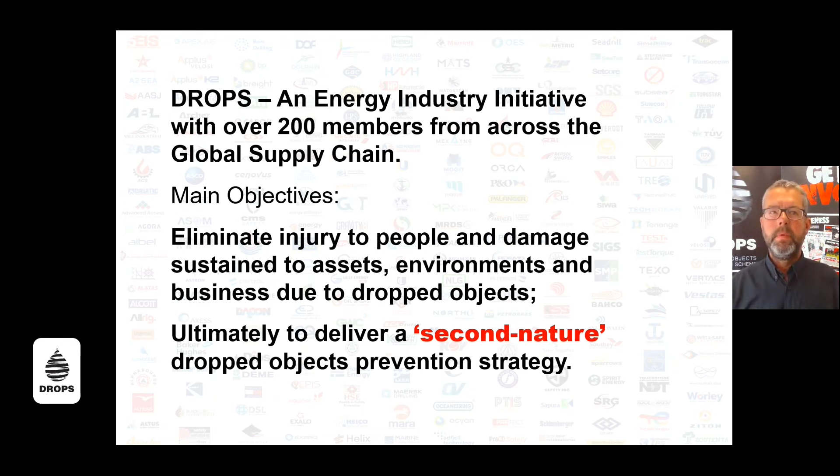First, we must acknowledge that there is a problem and that dropped objects do pose a significant threat to the business. Data from various sources confirms that dropped objects do continue to harm and kill personnel and members of the public. Typically, we learn from the unfortunate consequences of incidents. But once there has been an unplanned release of gravity's constant acceleration factor, there will always be a consequence based on the item's mass and the distance it falls.

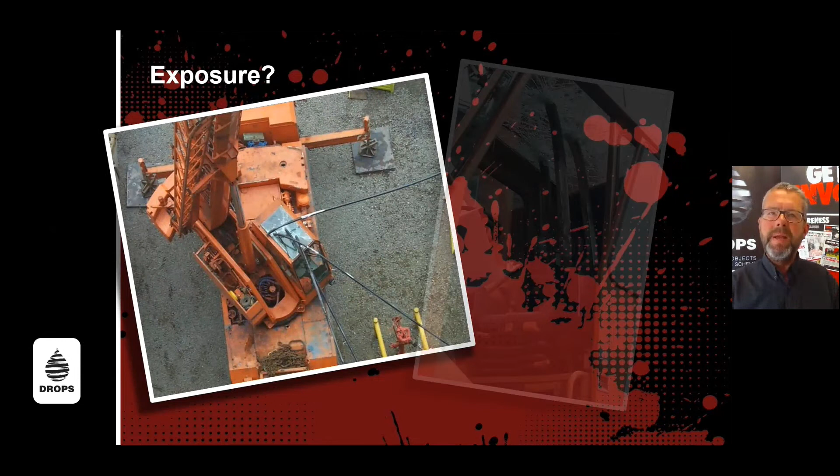Equipment damage can result in unnecessary loss and repairs, or loss of containment that results in spills or unnecessary waste. Ultimately, a dropped object incident will always cause damage to the business through lost time, lost money, and reputation damage. In studying dropped object incidents during lifting, there are many examples that can be described as failures in load securement. These fan tubes were being lifted in an open tray. The crane operator was very lucky that day.

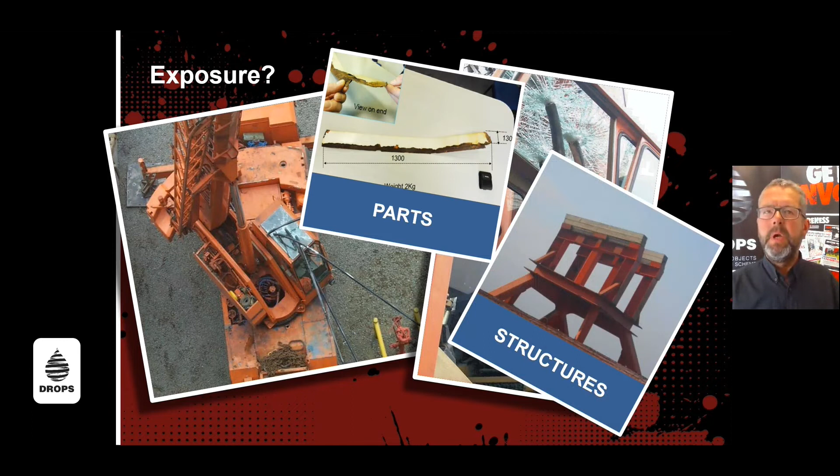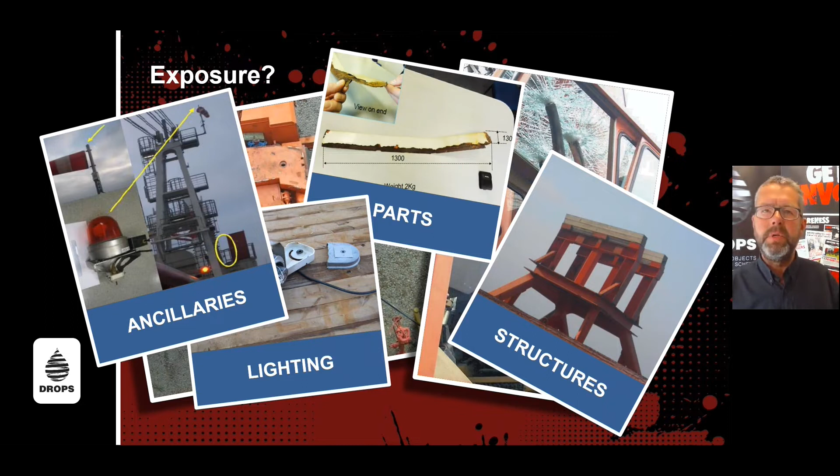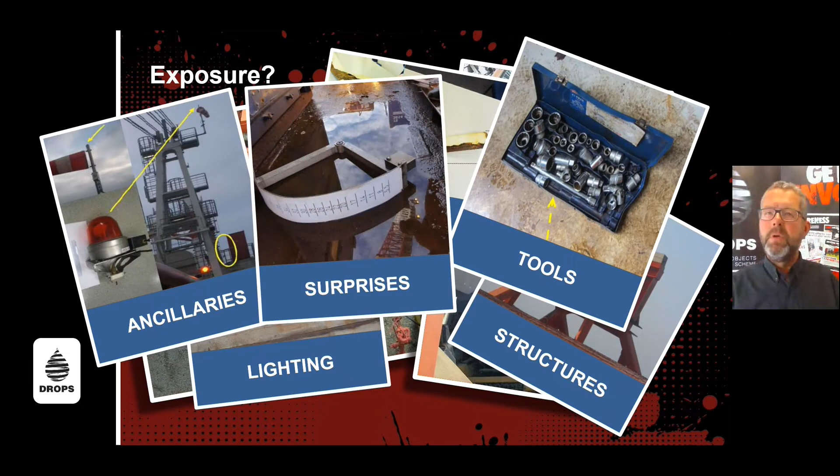Equally, there are incidents that relate to lifting and lifting equipment and illustrate that dropped objects can occur anywhere and at any time. After all, lifting equipment and ancillary fixings are subjected to continuous loading from lifting activities and the working environment. Cranes require maintenance at height, so tools can be dropped. And there's always surprises, from dropped level indicators, balls of congealed grease, and even nuts and bolts that secure individual items to the structure.

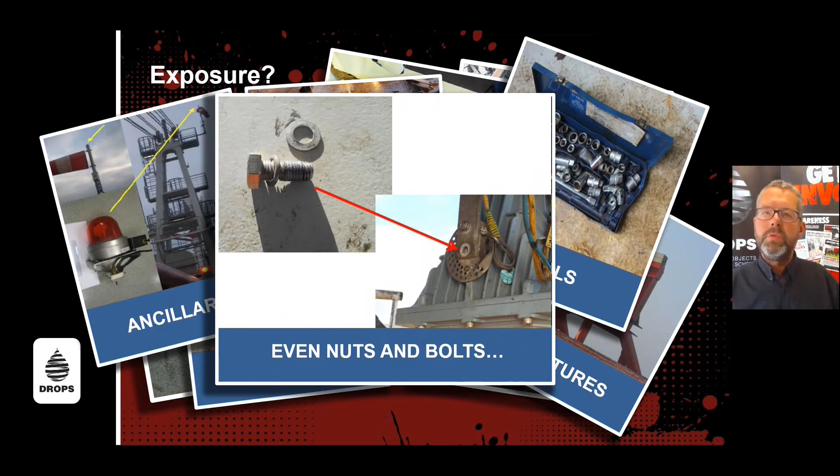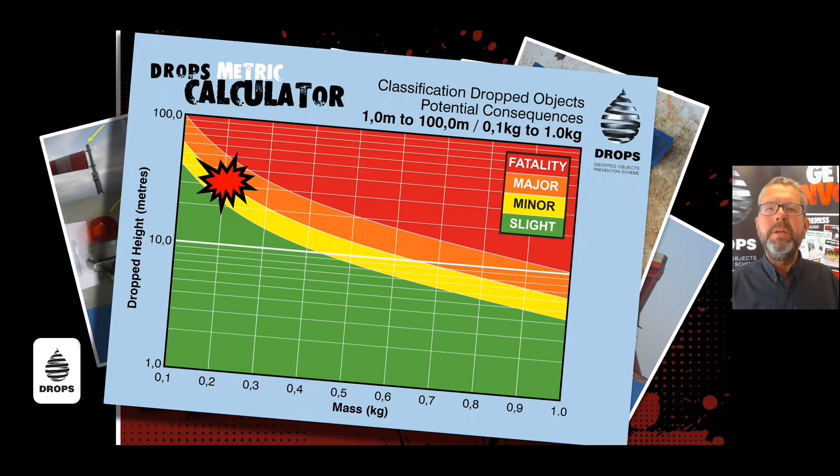But when using DROPS tools, such as the consequence calculator, it is apparent that even the smallest of items that fall from height can cause harm. In this example, if a 200-gram bolt was to be dropped over 30 meters, a life-changing major injury would be very likely. All incidents will have underlying causal factors, and investigations will highlight areas for improvement. Well, these common causes of dropped objects can also be considered as prompts to inform task planning and risk assessments.

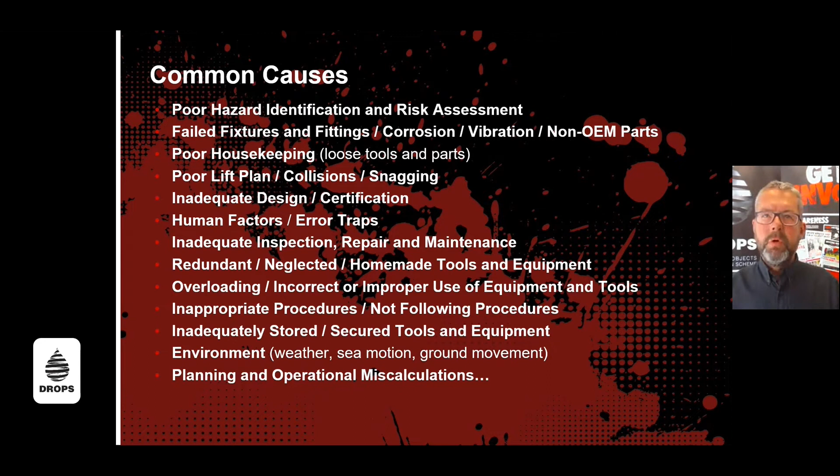When it comes to dropped objects during lifting, incidents show that almost all of these common factors are likely to prevail at the worksite. Human factors, or the range of physical, psychological, social, organizational influences which can affect how people carry out tasks, can also be considered as error traps, or the factors and situations that cause people to make mistakes. This is an area of focus that many industries have explored and addressed. These common causes also inform the continued development and improvement of shared industry guidance.

Although IOGP is the voice of the oil and gas sector, their recommended practice for lifting and hoisting safety is readily adaptable and includes a number of useful templates. Perhaps more importantly, it addresses safety management system elements, emphasizing that there are essential principles for every activity in every task. The guidance for categorizing lifts and developing specific lift plans is certainly an opportunity to address this in detail. Other industry resources, such as HPOG, the Human Performance Oil and Gas, presents adaptations of shared best practice in identifying and managing the factors that influence people and how they respond and work.

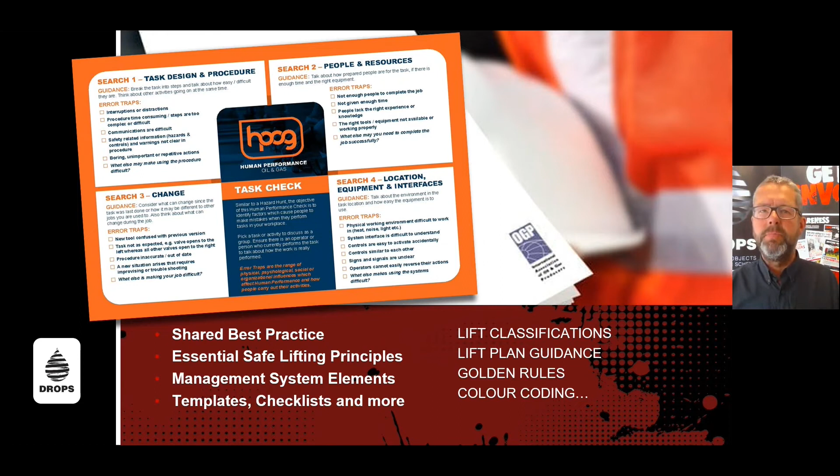But for DROPS, a comprehensive recommended practice offers high-level administrative guidance for establishing a scheme and addressing the fundamental requirements of a dropped object prevention strategy across every step. Take the time to realistically identify and assess dropped object hazards. This may be the opportunity to eliminate or substitute, change the hazards. All controls must be authorized and verified. Ensure these are being managed throughout the task planning and execution.

Ensure there is opportunity to talk about dropped object potential during pre-lift toolbox talks to reaffirm how they might occur, what controls are in place, and who will be responsible for them at each step. Pre-lift equipment inspections may follow a set checklist or picture book, but all personnel should be familiar with the concept of reliable securing, a great resource available from DROPS and a key part of a dropped object prevention management system.

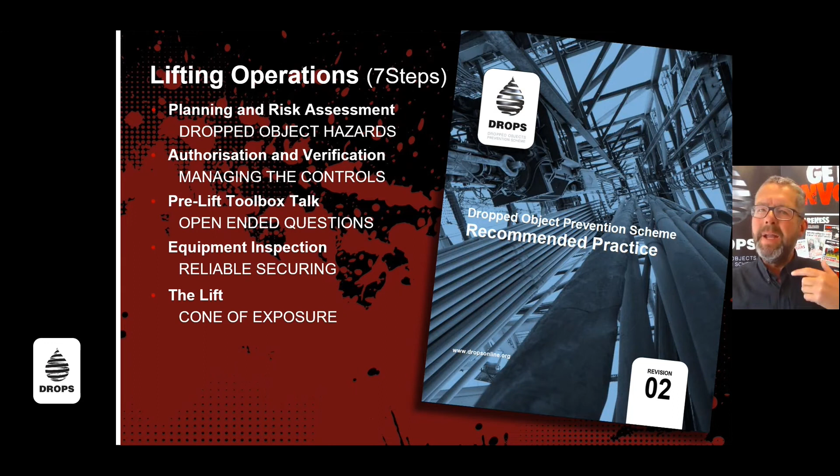As the lift is executed, there's need for constant vigilance in ensuring that access to areas within the cone of exposure remain restricted and that any critical equipment is protected where practical. And once the lift is completed, there are specific tasks to undertake, but also ensure that any damage sustained to equipment or damage to loads is inspected, recorded, and prioritized for corrective action.

Then exploit industry resources designed to support after-action reviews. Walk through and talk through the task to determine what went well and what could be improved.

Returning to reliable securing, this is a fantastic document that contains relevant and readily adaptable guidance for the securing of structures, equipment, and tools at the worksite, particularly where it was secured at height. A section covering bolting best practice, a simple guide to the various types of fastening methods found on equipment, provides basic awareness of the key principles of DROPS.

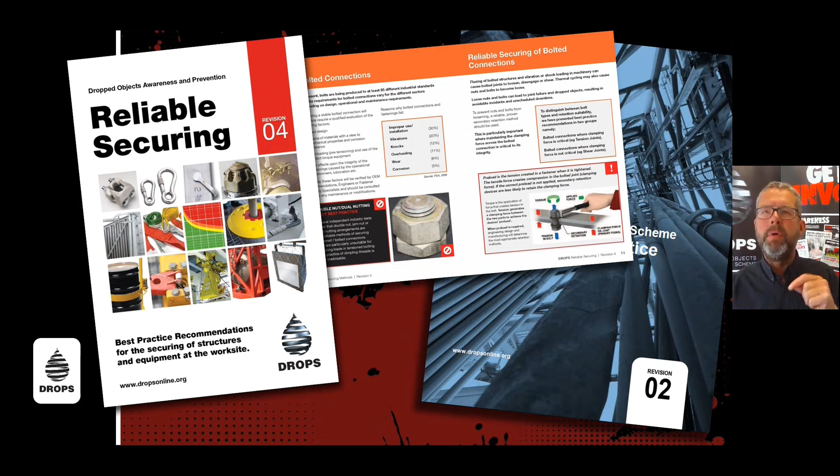Confirm and verify the primary method of fastening, the bolted joint, the clamp, the pin, the hinge, the strap, and make sure it's authorized and is per OEM, Original Equipment Manufacturer recommendations. Consider how this might be affected by external forces such as vibration, loading, etc., and identify the secondary retention device, the locking nut, the locking washer, the lock wire, split pin or safety pin, and understand how this is supposed to perform, and assess the requirements for additional safety securing, such as nets and wires and slings and tethers and lanyards.

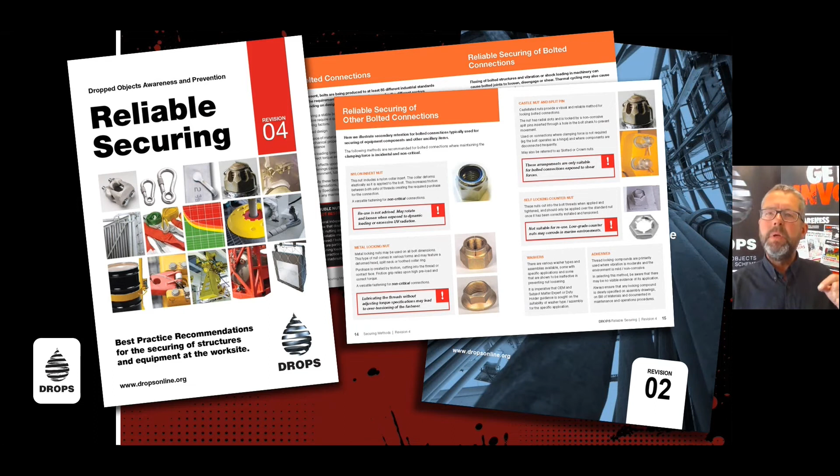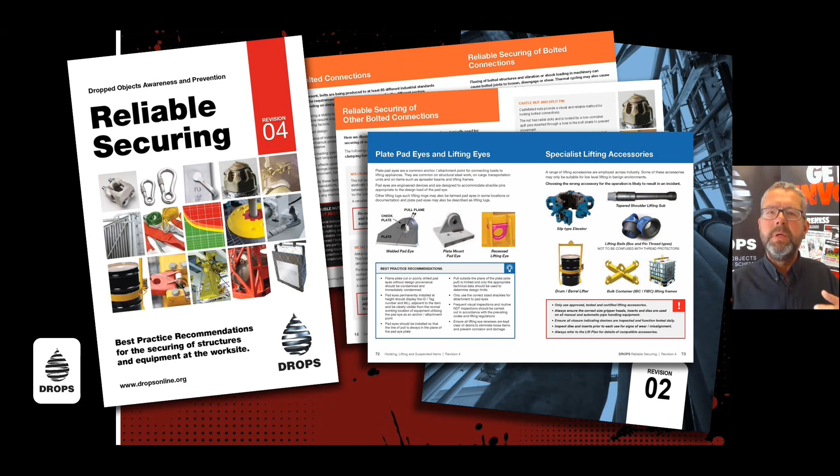Confirm that these are correctly fastened to items and back to the structure, and exploit the pages as overview guides or training and familiarization aids that illustrate a variety of common engineered methods for securing. Explore how each fastening and fixing functions and appreciate what to look for in equipment inspections and confirmations at each task step. Where personnel are required to work on cranes at height, adopt the best practices illustrated in DROPS guidance.

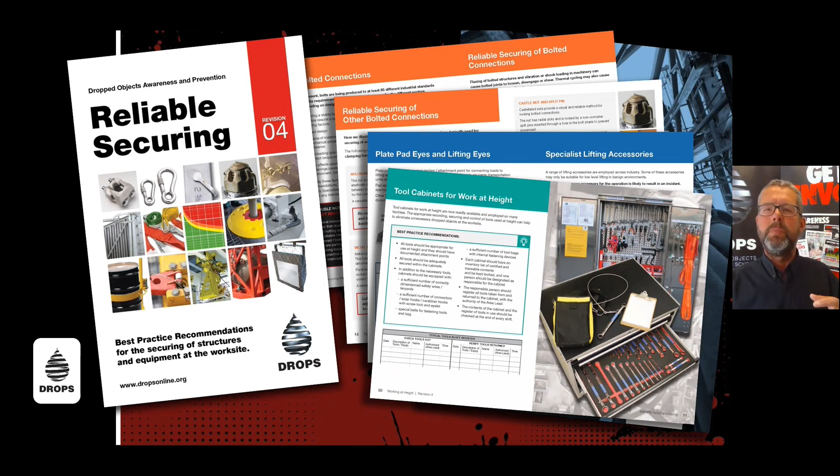Eliminate unnecessary and loose items. Select tools suitable for use at height. Consider bespoke mobile toolkits that contain only the tools required for the equipment. Create inventories, track and trace tools and equipment aloft with logbooks, and ensure 100% tie-off principles are observed from the time the items leave ground level to when they are returned.

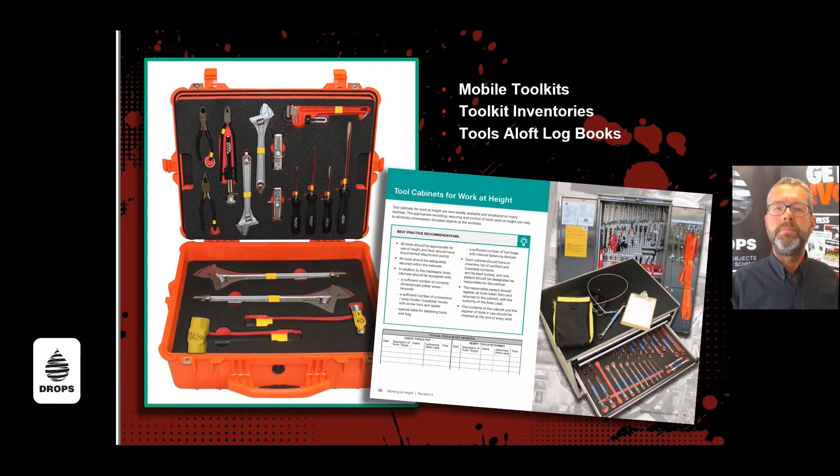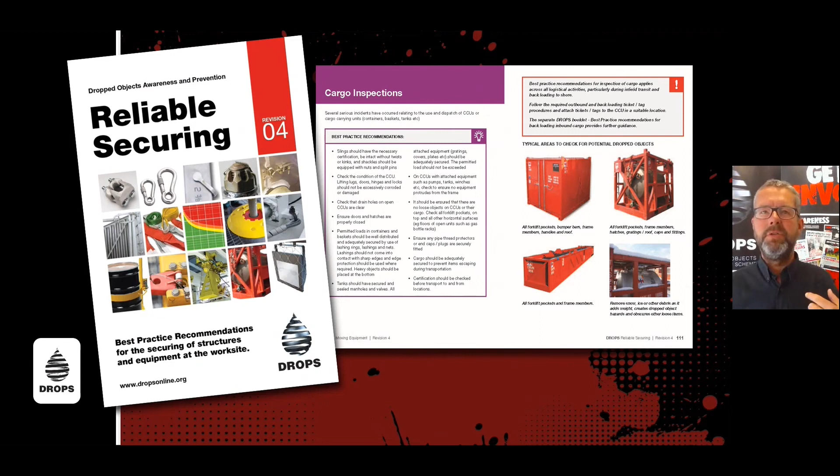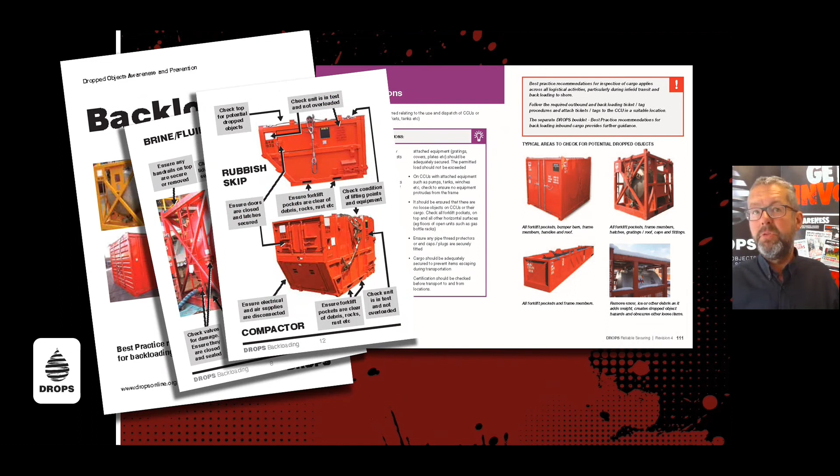Within the booklet, there are many examples of worksite inspection prompts and checks, including pre-lift cargo inspections. Whilst there may be generic checklists, consider how each individual item presents its own unique challenges. DROPS backloading supports this in more detail, with pictorial references presenting key areas to inspect, beyond the obvious checks for loose items or debris in forklift pockets. Adopt the best practices in sharing responsibilities and being accountable for the final checks, particularly when the lift involves the onward transportation of cargo.

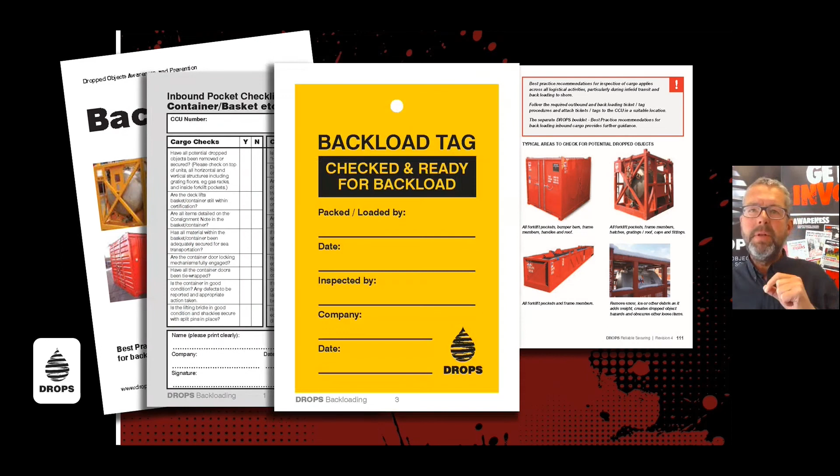And then the 10 questions for a safe lift may be a common prompt, but it is the last step prior to performing the lift, and it's a critical component in confirming and in verifying that all elements of the lift plan, including all securing and safety devices, are in place and functioning correctly, and that the restricted lift area is controlled and clear.

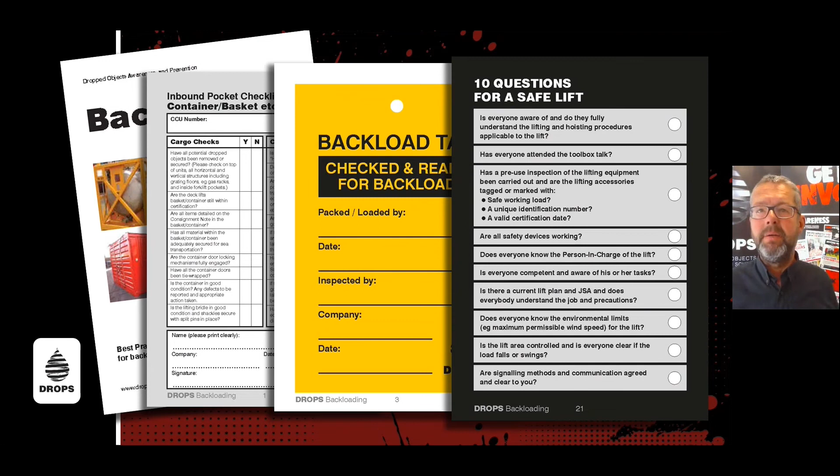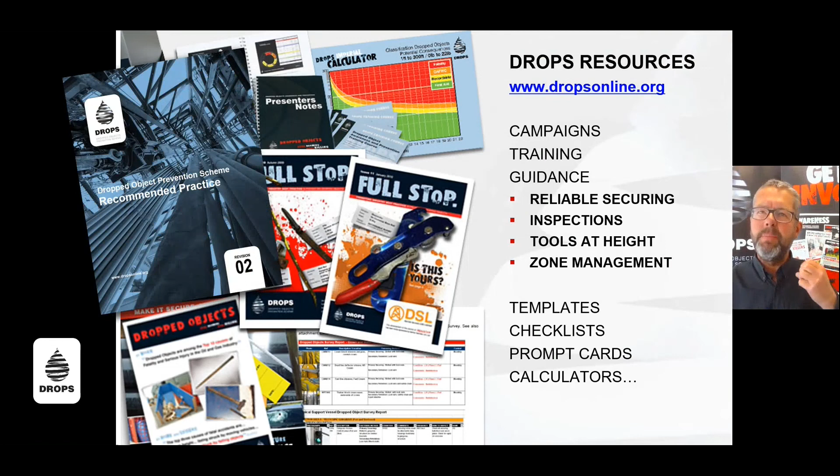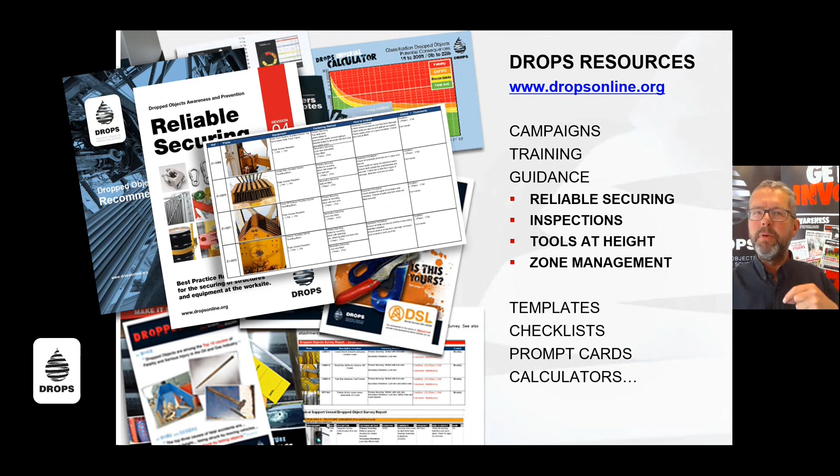In fact, there's a wide range of free to download material available through the DROPS website, from awareness campaigning posters to guidance on establishing management systems and systematic equipment and worksite inspections. The consequence calculator is available in both posterized and functioning Excel format, along with an exclusion zone calculator that can help determine deflection trajectories. Simply enter the height of the object and the deflection point above the ground, and then use the slide bar to alter the deflection point.

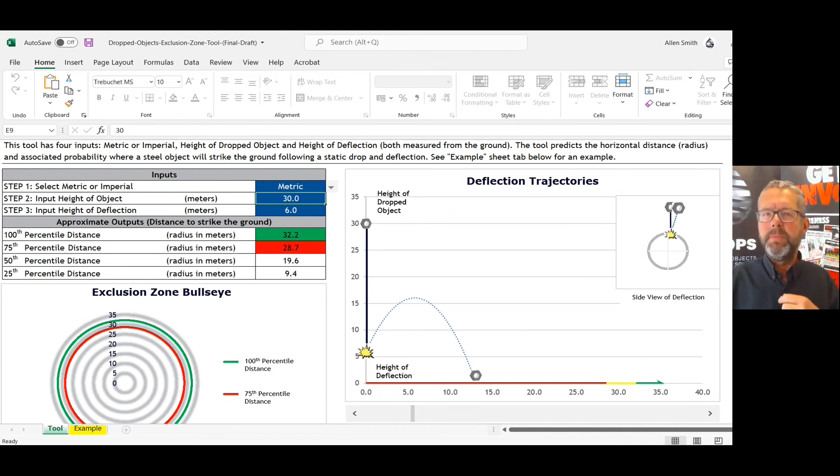It's a great awareness tool, refocusing the task plan to ensure that all aspects of the hierarchy of control have been studied, opportunities for elimination exhausted, opportunities for substitution sampled, and all engineered and administrative controls confirmed and corroborated. There are many other resources available through industry, particularly online, but for dropped object prevention in particular, and with reference to lifting and lifting equipment, I believe you'll find these useful and adaptable. If you do work in the wind energy sector, you will be interested to see an example of DROPS guidance readily adapted for your industry.

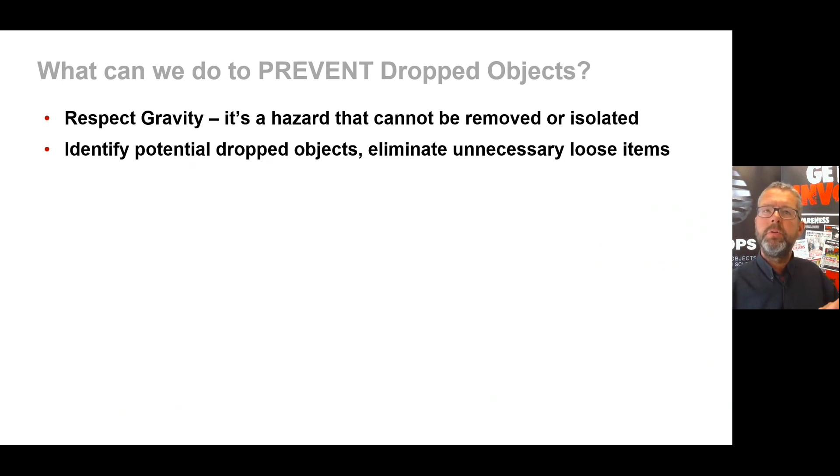So what can we do to prevent dropped objects? Well, respect gravity. It's not quite like other hazards. It cannot be removed. It can't be switched off, and it can't be isolated. We must identify the potential for dropped objects in every task step. We must do more than just eliminate the loose and unnecessary items. We must be prepared to walk through each task step and consider how gravity and other forces will affect the lift, and ensure that all controls are installed and verified.

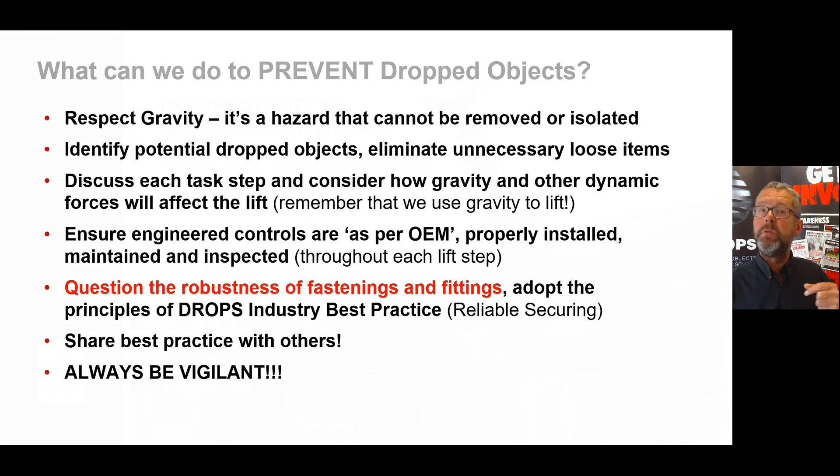The OEM recommendations should always be followed. And with a greater understanding of how fastenings function, we can question their robustness, particularly where they may become snagged or exposed to contact with structure or another piece of equipment. Sharing best practice and lessons learned is ultimately how we've all developed and implemented safe working practices. But with dropped objects, we must always be vigilant, because dropped objects can occur anywhere and at any time. So get involved, explore DROPS resources, share it with your colleagues, and help to make a difference.